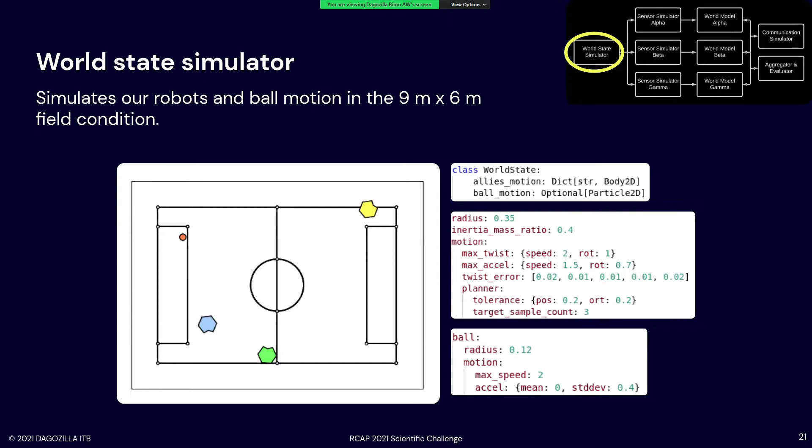Now here's the experiment. We developed an idealized simulation environment to simulate real-world state, sensors, and communication with latency in ROS nodes, where each algorithm is evaluated over 5 times 3-minute simulations, or around 30,000 data points, and analyzed based on statistics such as medians and upper quartiles. Here are the nodes. There is the world state simulator, which simulates the robots and ball motion using simple planar physics. Sensor simulators simulate each robot sensor with error profiles in independent Gaussian distributions for each component.

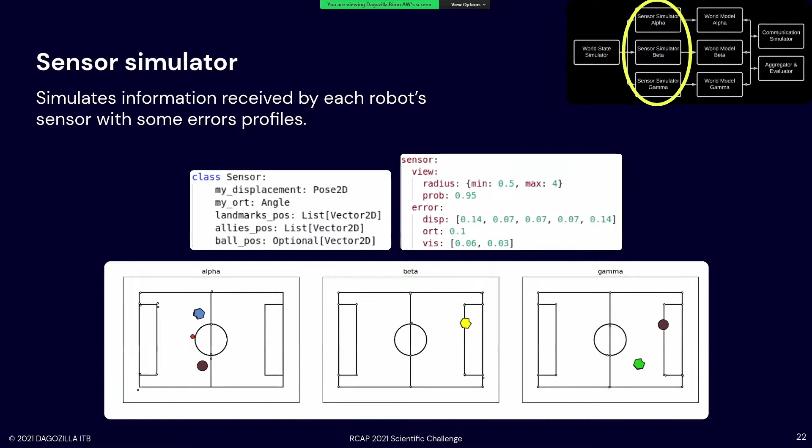And then here is the communication simulator, which relays communication. It's modeled as a two-state hidden Markov model, with stable and unstable states, each with their own distribution of latency and message drop chance. There are 3 simulation scenarios based on stable network condition percentage, where good is 80% stable, moderate is 50%, and bad is 20%.

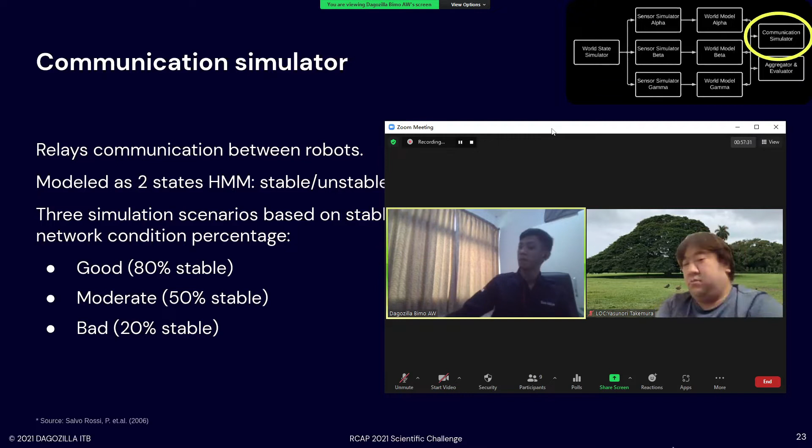Now, because it's a hidden Markov model, we can tweak the percentage of time the network is stable compared to the unstable network condition. So by tweaking the hidden Markov model chain, we can set three scenarios where the good network condition has 80% stable network condition time, moderate has 50%, and bad has 20%. If that answers your question. Okay, thank you very much.

So this is a simulation situation. Yes, that's right. So if you are using it in a real situation, which condition is most fit to the good condition, moderate condition or bad condition if you're using the real robot?

I'm sorry, I can't quite catch your question. Can you repeat it for me? Okay, so this is a simulation situation. Yes. So if you are using the HMM model in a real robot, what accuracy do you want or do you expect from utilizing this kind of modeling?

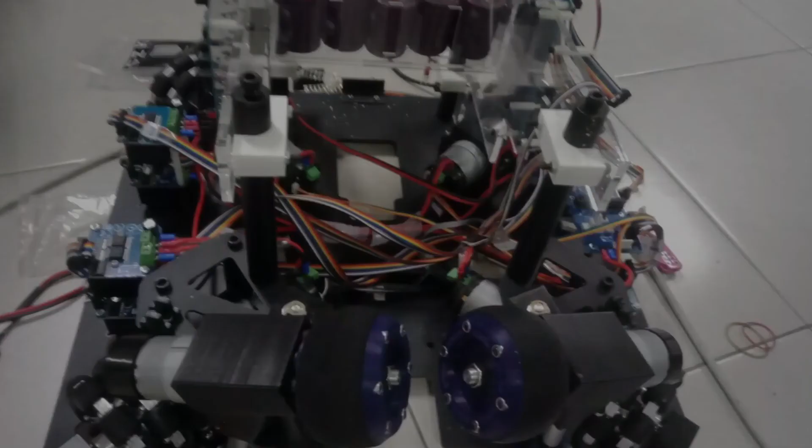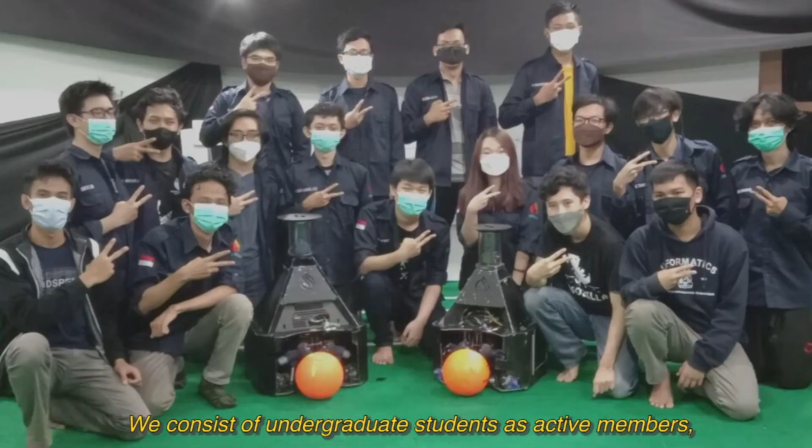We are Team Dagozilla from Bandung Institute of Technology, Indonesia. We consist of undergraduate students as active members and some alumni as team advisors. We started our journey in 2016, where we participated in a national exhibition of mobile soccer robots. In 2017, we competed in our first national robotic contest.

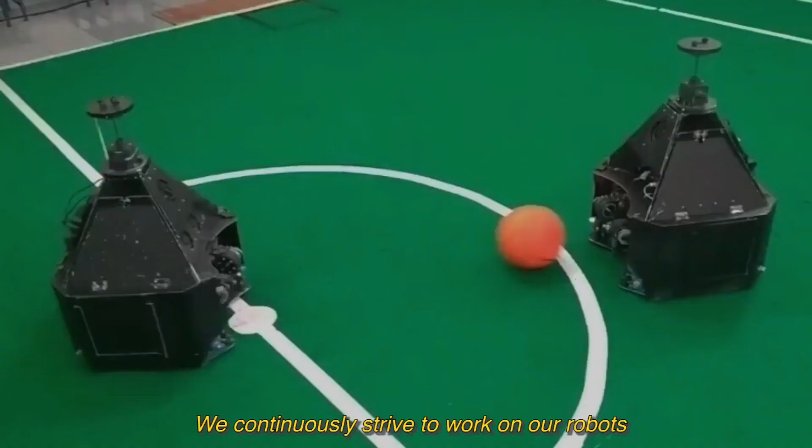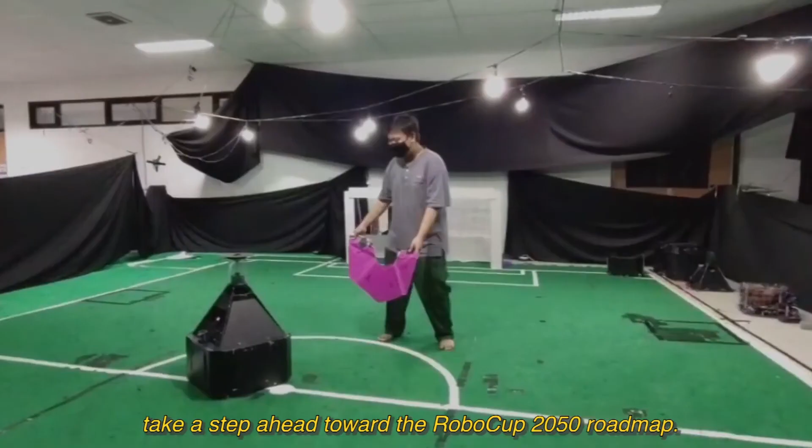On a daily basis, we develop our robots for competition purposes. We also do some research to make fine improvements on our robots. We continuously strive to work on our robots because we want to improve our skills. That way, we will be able to fulfill our dream, that is to win competitions and take a step ahead toward the RoboCup 2050 roadmap.

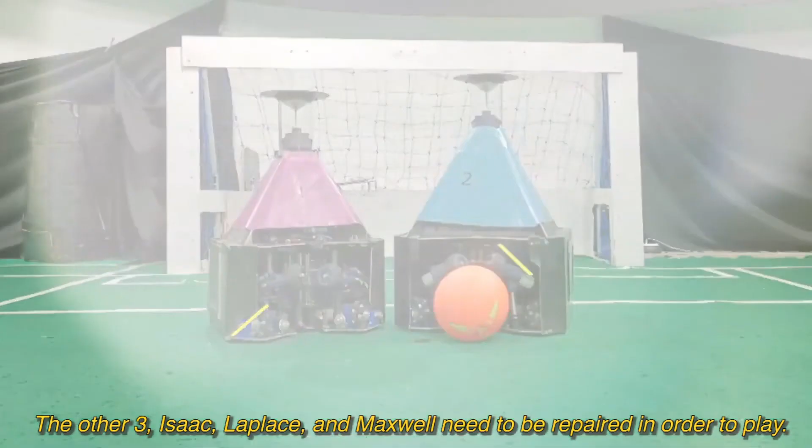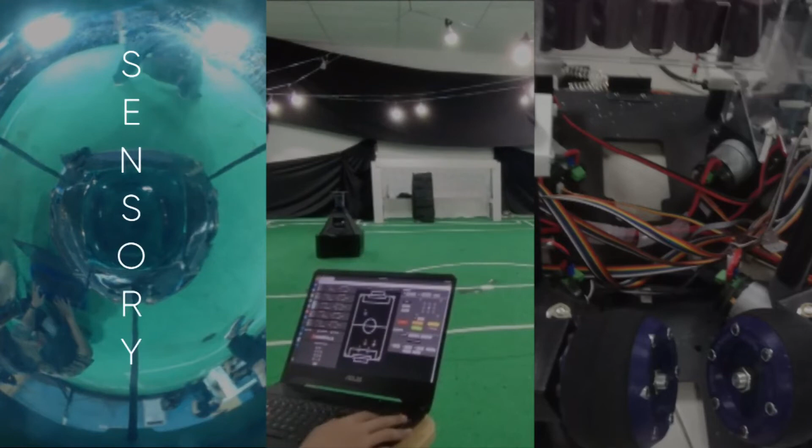Here are our robots. We now have two fully functional robots, namely Jacobi and Kirchhoff. The other three, Isaac, Laplace, and Maxwell, need to be repaired in order to play. Our robots, in general, can be divided into three subsystems: sensory system, moving parts, and controller. Sensory system is responsible for sensing the field and the robot's surroundings. It consists of a camera, proximity sensor, orientation sensor, and some motor encoders.

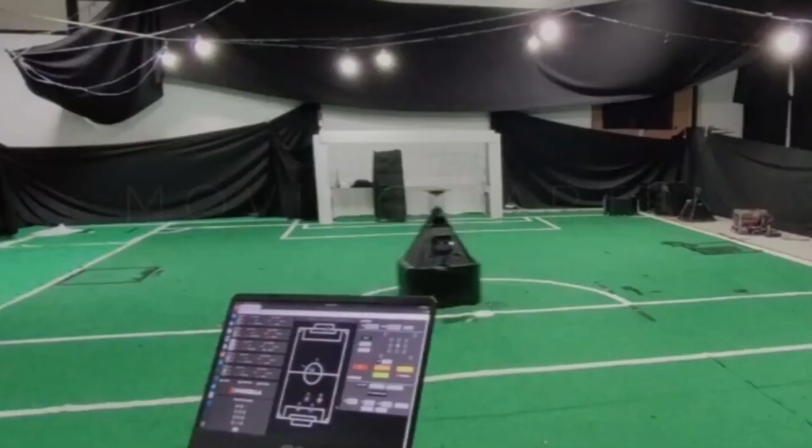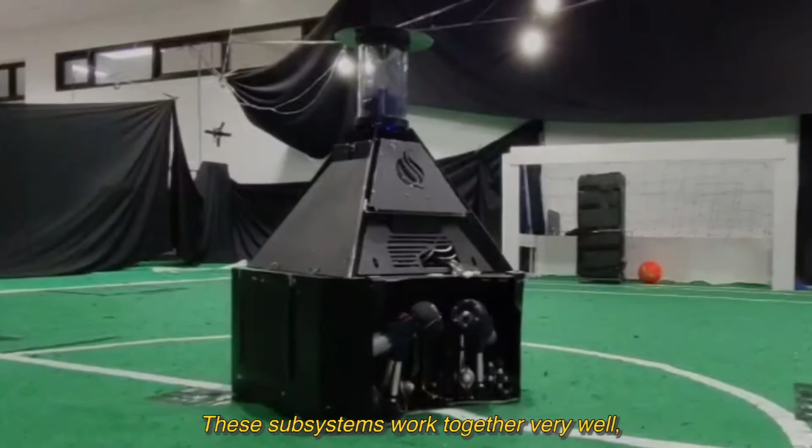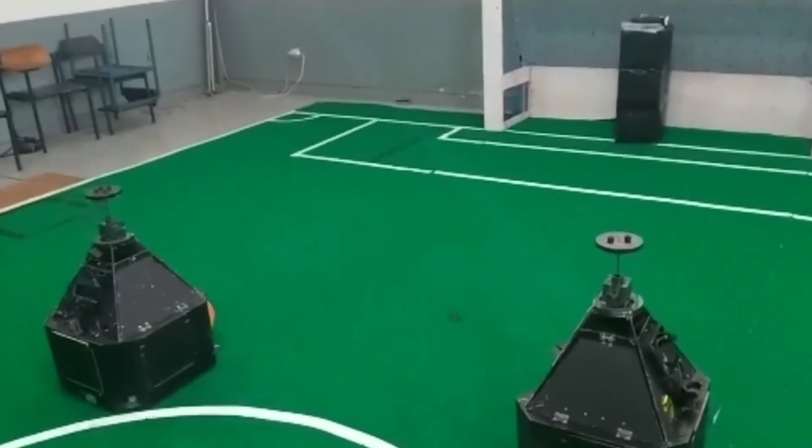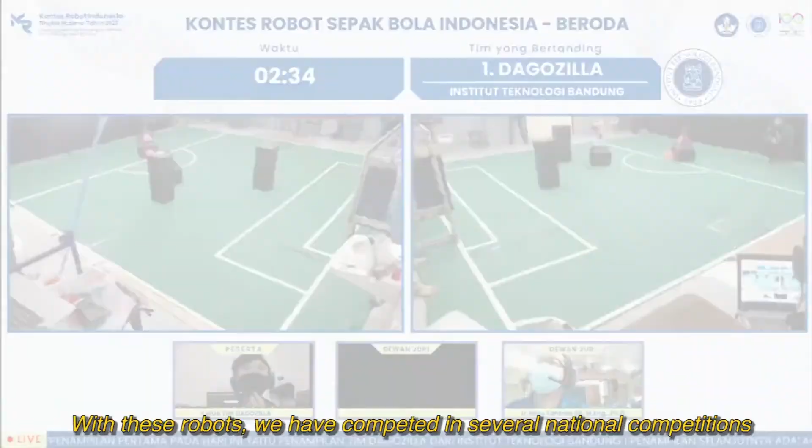While the moving parts consist of motors and a kicker, the controller consists of a microcontroller and a PC. These subsystems work together very well, creating more specific functionalities such as robot's perception and localization. Here are some of them. For the kicking mechanism, the robot can do two kicking modes: parabolic and straight, which is controlled by a servo connected to the lever. With these robots, we have competed in several national competitions and won some prizes.

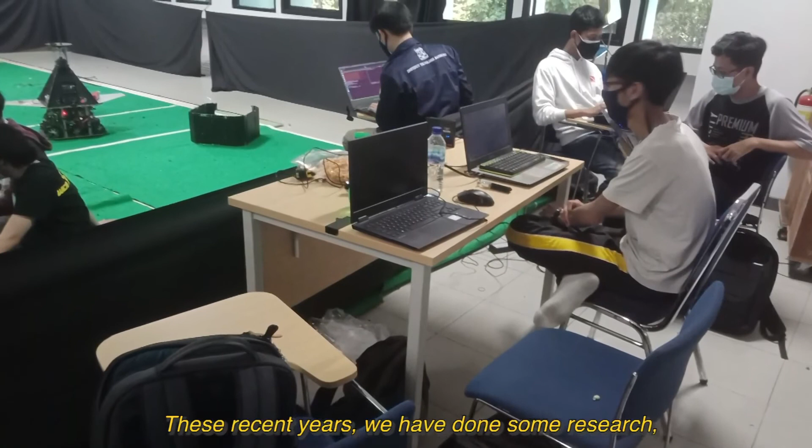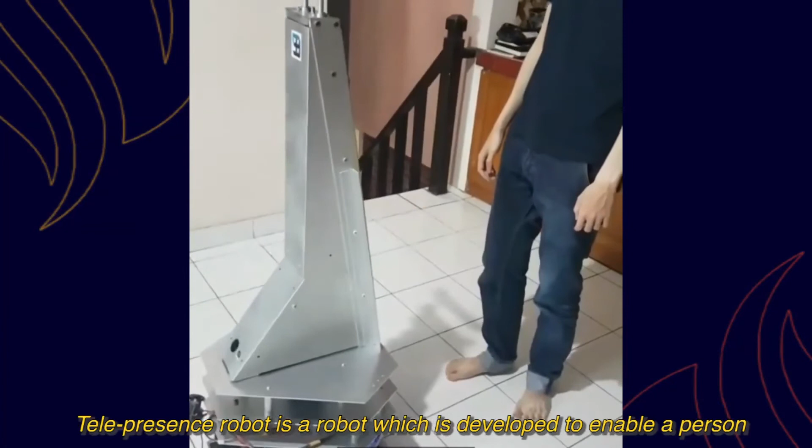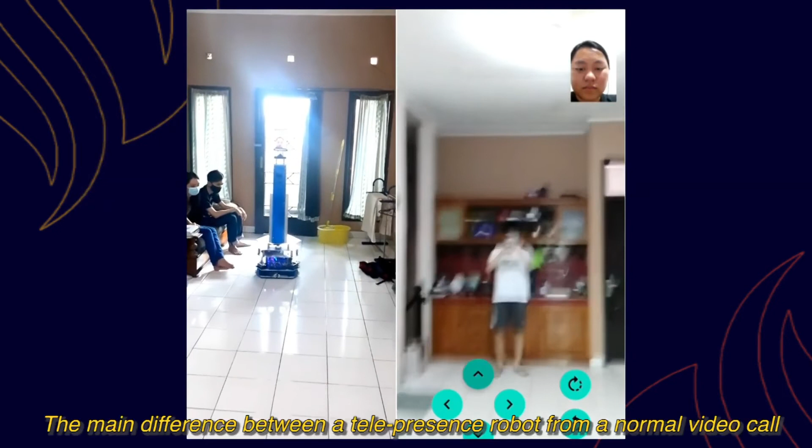To advance in the development of the robots, research is a must. These recent years, we have done some research not only for the competition robot, but also for robotics in general. This is our telepresence robot. Telepresence robot is a robot which is developed to enable a person to virtually attend meetings, lectures, etc. The concept is just like a video call. The main difference between a telepresence robot and a normal video call is that the operator can control the robot to move through an Android application.

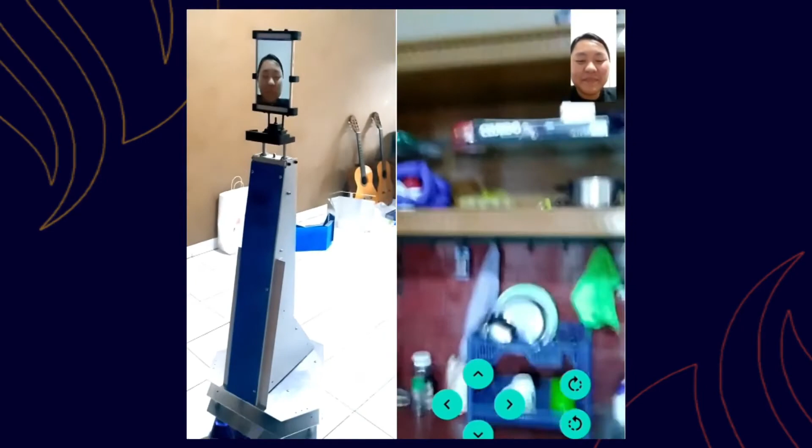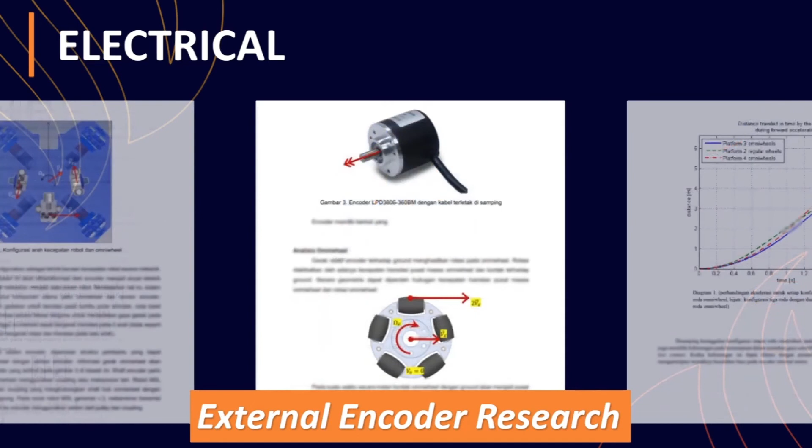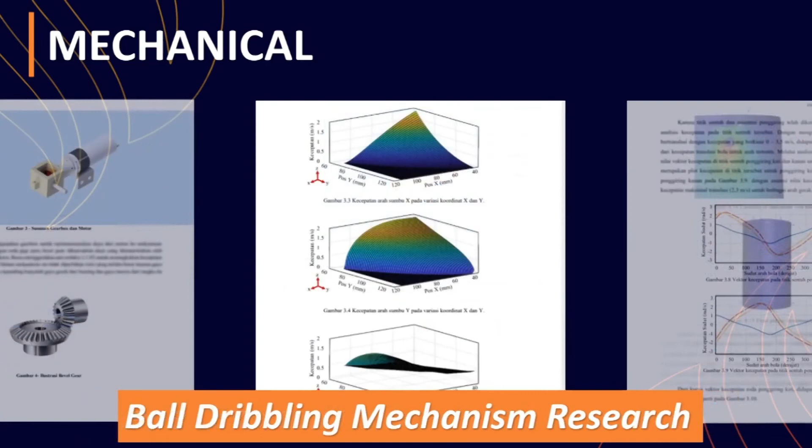Here, we show our competition-related research. Our research varies from mechanical, electrical, and programming things. In electrical, we did research on topics such as external encoder, locomotion system, as well as its control and kinematics. While mechanical crews explore the keeper expanding mechanism, ball dribbling mechanism, and robot vision. As for programming, we simulate the robot's vision and strategy.

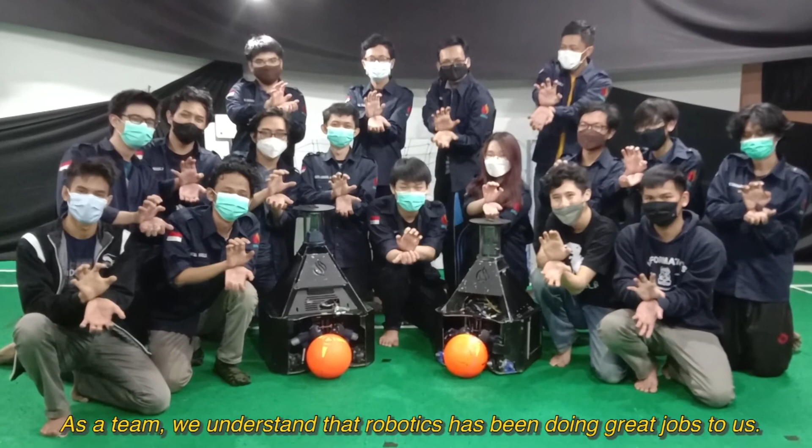In these years, we also take part in ISRSC, Indonesia Symposium on Robotic System and Control. Here, we show the papers we submitted in 3 ISRSC events from 2017 to 2019. As a team, we understand that robotics has been doing a great job for us. However, we are still far from the limit. Therefore, we want to share our knowledge about robotics with people around us, so that we can accelerate robotics development in Indonesia.

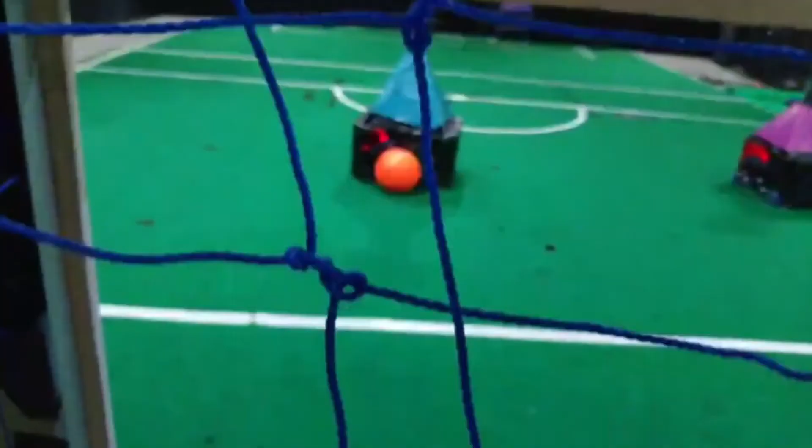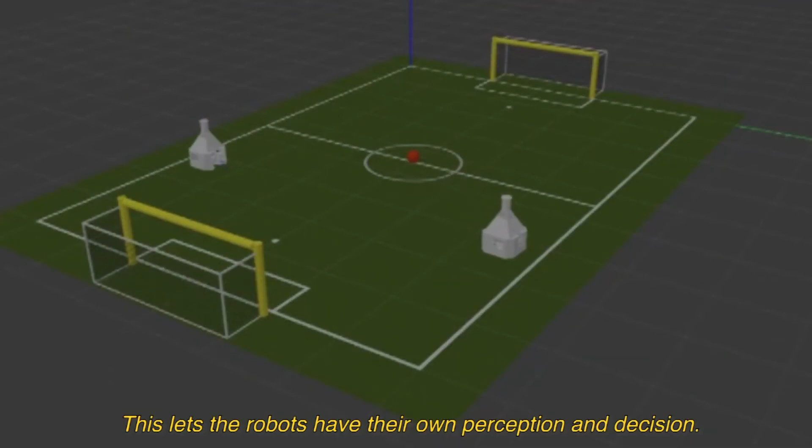Our short and informal survey shows that AI has been one of the most attractive topics from the perspective of commoners. Also, in this era, AI has been a really great success in lots of ways. Therefore, we can utilize this as the entrance to introduce science, engineering, and especially robotics. In our robot, AI has been playing a very significant role, especially in strategy development. This lets the robots have their own perception and decision. In just 2 years, AI has managed to bring us the Best Strategy Award in the 2019 Regional Robotic Contest and even the Elite Four title of the National Robotics Contest in the same year.

Not only in robotics, AI in general has brought humanity closer to ease and convenience. For example, in 2019, the businesses adopting artificial intelligence had grown by 270% in 4 years. The use of AI is enabling review and translation of mammograms 30 times faster with 99% accuracy, reducing the need for unnecessary biopsies. 46% of US adults use digital voice assistants to interact with smartphones and other devices. Artificial intelligence facts show that Netflix's recommendation engine is worth $1 billion a year.

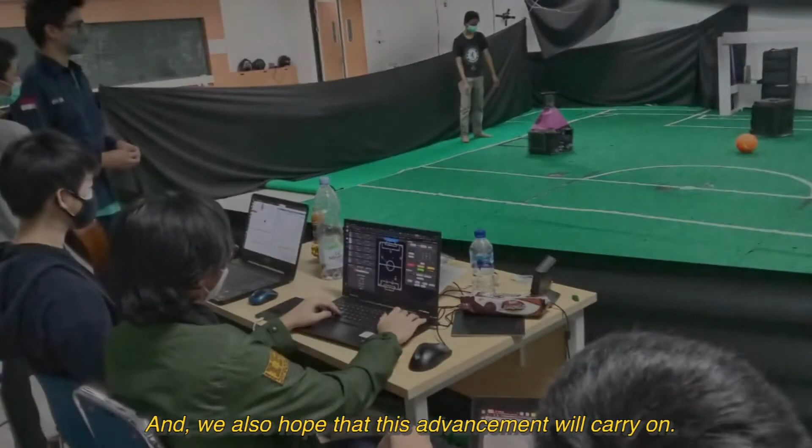Even in handling world-level threats, COVID-19, AI has helped us and is getting us to the end of this pandemic. And we also hope that this advancement will carry on, creating a better future. For that reason, learning AI is very important. We may start it with robotics.